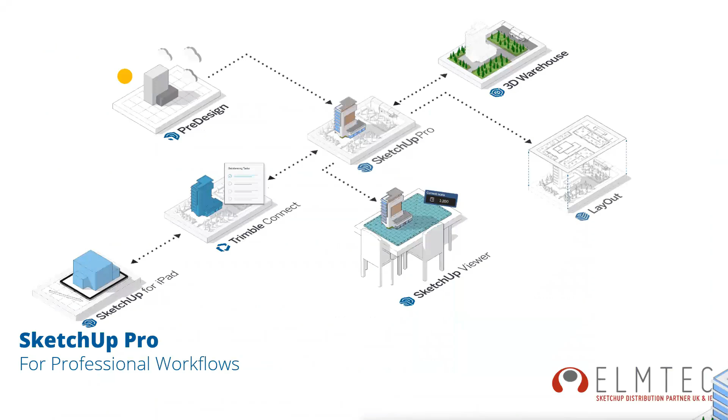I'm just going to flick through these things here. And whilst I'm talking, I will throw that one up. Oh, that was the results of that, by the way.

Let's just give you a little overview of the current ecosystem for SketchUp. SketchUp Pro, you're probably all familiar with it, the main core 3D modeler, the desktop one most of you are probably using on Windows and Mac. There are a whole bunch of other products that come included with that. There are two primary SketchUp professional subscriptions available at the moment. We've got SketchUp Pro, which is for professional workflows.

And then we've got SketchUp Studio, which is for more advanced workflows. This has got a few extra components we'll talk about also, and new for this year, because it's not on this graphic, we've also got the Revit importer, which we will talk about today.

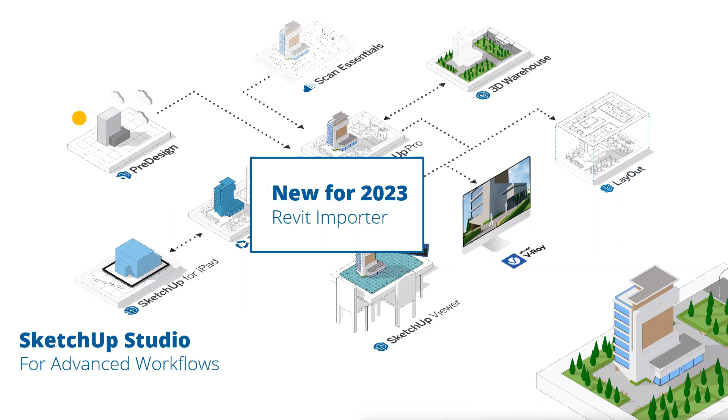So today's webinar will go through some of these components of SketchUp, things you already have access to. I'm going to introduce a few things that you may not be aware of, and introduce some of the new features of SketchUp 2023 as well.

So what we know about SketchUp is it's used across various design stages, and it's accelerating the design process from concept through to design, modeling, stakeholder collaboration, construction, documentation, and more. Depending on the industry you work in, you may be only operating within one of these phases, or you may be operating across all of them. But what we want to show you today is perhaps how you can operate across more stages, or collaborate better with other people using SketchUp or other products.

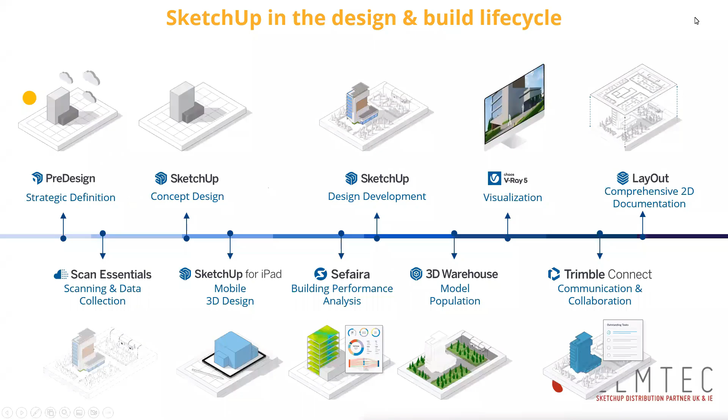This will have links to downloads for anything included in your subscription, links to learning content, tutorials, the ability to sign out of any installations you have, all kinds of stuff. So if you've never visited myaccount.trimble.com, it's a super, super useful link to be able to get to.

And we're going to go through some of these products just now. Let's bring that one up again. Sorry, I have to flick in and out of desktop a few times and it kind of pings off.

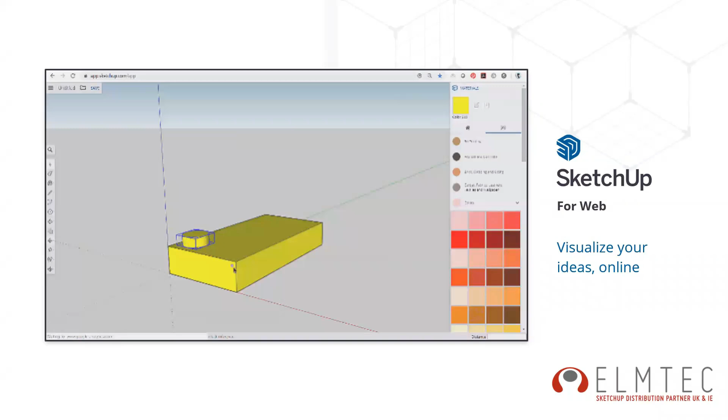Included with your subscription is SketchUp Pro for desktop, which is likely the core reason you're using SketchUp. You've also got access to SketchUp for web, a slightly more sophisticated and fully functioned version of SketchUp free. It has all the main stuff you'll be familiar with, and it's constantly being developed, getting closer and closer to the desktop version. There are some really nice advantages to using SketchUp for web, the main one being you don't need to install anything - you can access it anywhere by signing in via the account management portal or app.sketchup.com.

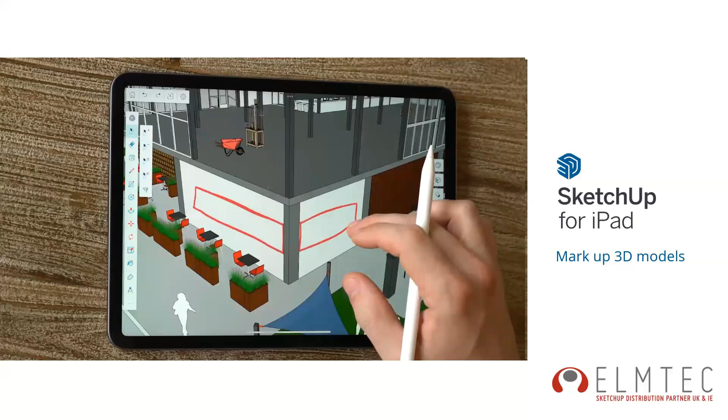Newish, launched last year, we launched SketchUp for iPad. This is included within a SketchUp subscription. If you have an iPad and haven't tried it, simply download it from the App Store and sign in with your subscription Trimble account, which unlocks the SketchUp viewer into a fully functioning SketchUp editor. It's very similar to SketchUp for web, but with some unique iPad specific features, like a touchscreen interface and support for the Apple Pencil.

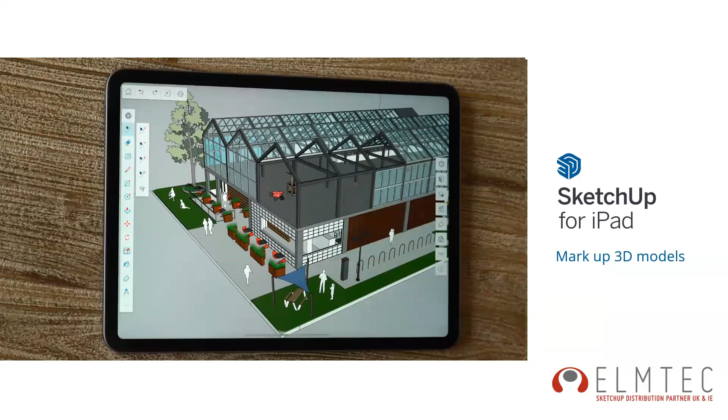What we can see going on here - I'm not sure if it's going to loop round again - SketchUp for iPad has a really nice mode called markup mode, which allows you to draw directly onto your model, annotate it, and make notes. It saves it into a scene inside SketchUp, and you can then project those into textures onto your model as well. Some really nice functions inside of SketchUp.

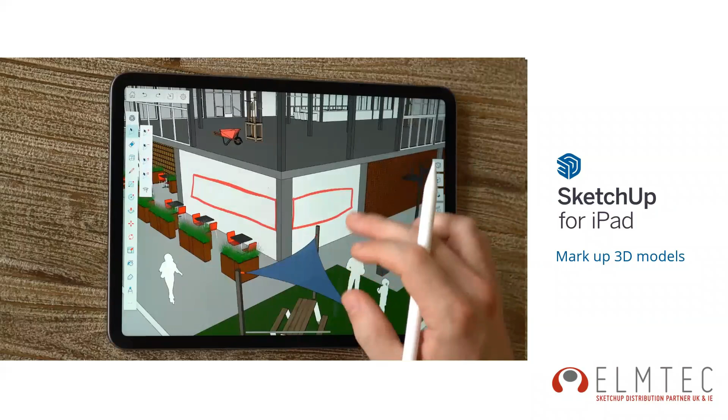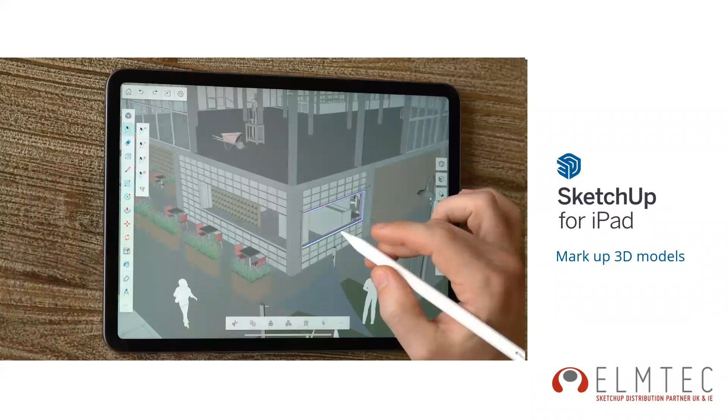This year, there are additional functions you'll be familiar with from the desktop version which have also been added to the iPad one. We're not going to go through all of those since there's too much to talk about, but take a look at SketchUp for iPad. It's really great, actually - I wasn't sold on it at the start, but I've had a lot of time to play with it, and it's super great.

One of the things we can do with it beyond just modeling is actually place our models directly into the scene. You'll have seen these kinds of things already, but you'll be able to do it yourself with either things you've placed inside your model, or perhaps even a whole building or structure if you need to show somebody how that might look in situ.

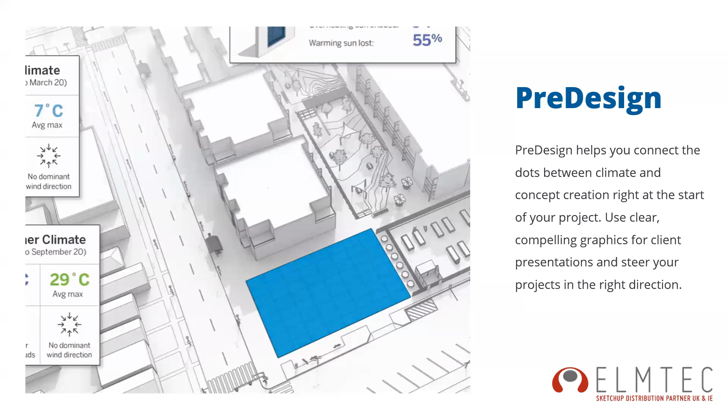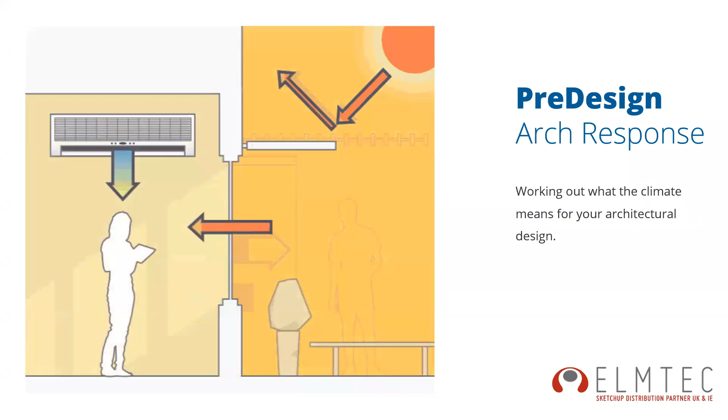So we're going to have a look at something - we'll do a little demo of this one. This is going to be particularly useful for people working in architecture or construction. There's a web service included with SketchUp called pre-design, which there's a couple of different ways to get to, and we'll take a look at in a second. Pre-design is a sort of climate insight and site insight tool - it gives you information about the location where you may be planning to build or design around, and hopefully some broad insights into things you might want to be considering. There's some really great stuff you can get to on here.

Let me just open it. There are a few different ways you can access it - directly inside SketchUp via the file menu under pre-design, or you can visit predesign.sketchup.com since it's a web service. I'd really suggest you have a good look at it; we have some built-in tutorials - click here to do guides, which takes you on walkthrough guides for how to use it. I'm just going to show you broadly how it works.

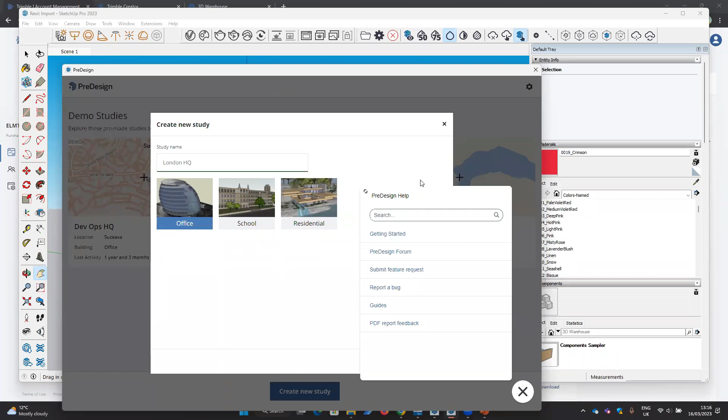I'm going to make a new project called London HQ, and set this type of project as an office project. I'm going to set its location - being super lazy, it'll just be generically London - and click continue. It's going to set some schedules for when the building will be used, and basically bring up some information about that site and location. It's just populating that report right now.

What we'll see here is some really great graphical information when it loads. I was keen to show this live, because I think it's one thing showing an animated GIF, but another thing to be able to show the actual thing working correctly.

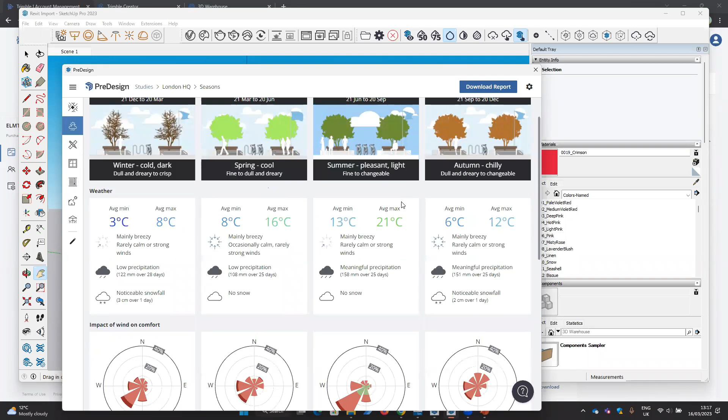Definitely go have a look at it if you're an architect, I think you'll find this super useful. We can pull up sun diagrams for the location, and information about seasonal variance. In the UK you might not assume it varies so much, but perhaps you're working in other parts of the UK or all over the world.

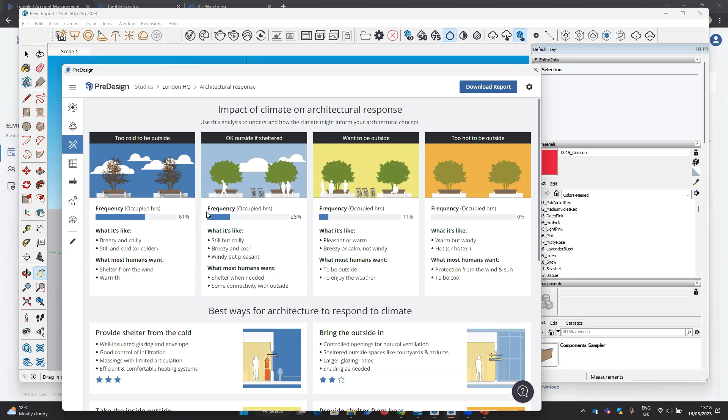We can bring up information about the predominant wind direction, precipitation, daylight hours, all kinds of stuff. This is useful to show a client, to explain why we're starting to make some of the decisions very early on.

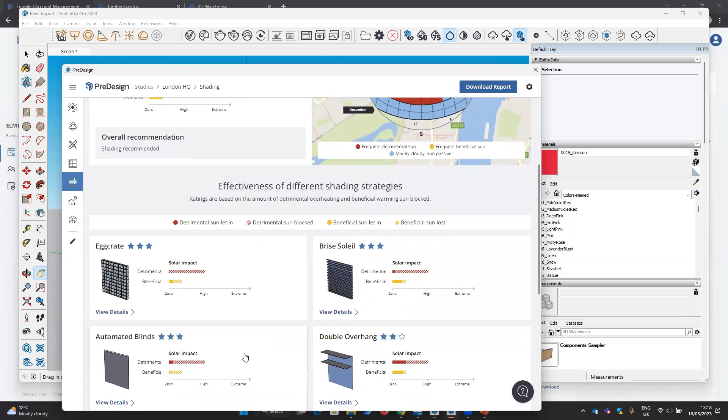There's some really amazing stuff here about sun overheating, the effect of the sun on different facades, and it will give you advice about the effectiveness of certain glazing and shading solutions on different sides of the structure. So have a look through that, it's interactive, with some great graphics to help you get insights into what you're working on.

So I'm just going to close that. You can even download a little PDF report that has everything in it. Let's head back to my slides.

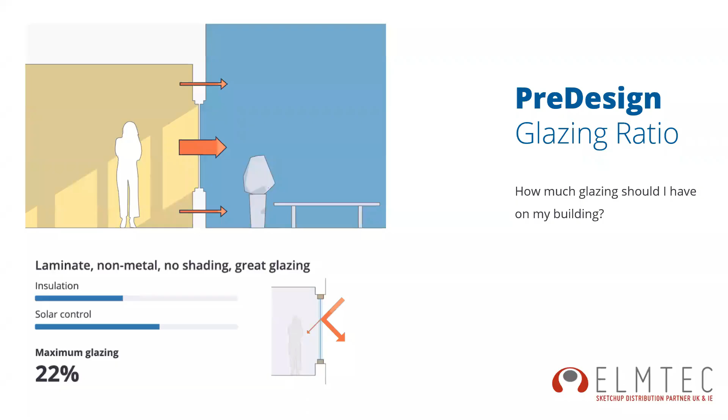Slides, come back please. There we go. Yes, so there we are - Predesign.sketchup.com. Really great.

We're going to move on to something else in just a second. We're going to talk about Trimble Connect, which is again another key component of a SketchUp subscription now, and kind of the glue that binds together various different packages.

But I just realized I wanted to ask some actual questions about the industries people are working in, because I probably should have thought about this and tuned my language accordingly. If you could let us know what kind of segment or industry you work in, or who you're working with, that'd be really great.

There we go, we've got some other ones. Thank you - submarine telecoms, architecture, event and production. Yes, I only had 10 slots to put on this, so thank you, it's really good. Events, yes of course, garden design, yes brilliant, interior design, yeah, so thank you.

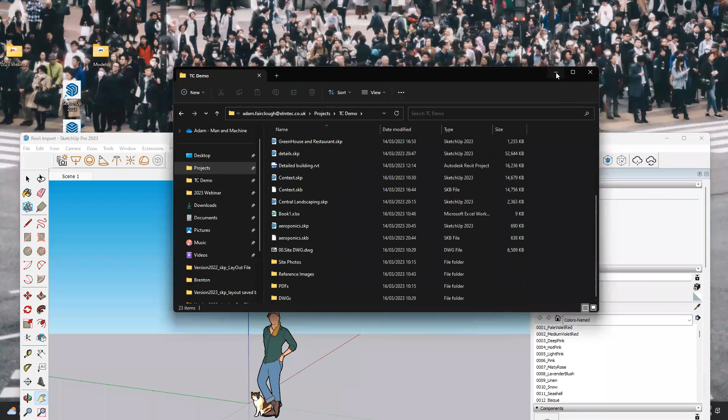Yeah, I've lost my window. Where's it gone? So here we go.

With Trimble Connect, there are a few different ways we can do this. We can create a project and drag and drop our files directly into the web service, or, as I do, visit Trimble Connect, go to apps, and download an app called Trimble Connect Sync. This is available for Windows and Mac, and it will automatically sync your local project files with the cloud project files.

Trimble Connect has massive accreditations and meets various ISO standards, so even if you're working in a very large organization, you'll find it probably hits all of the security policies and things you need on the head. So let's come back to where we were.

This is what you might see to begin with - this is synchronizing with my local computer. Every time I save a file in SketchUp, update a PDF, add another photograph, or make a change for DWG, the Trimble Connect Sync app will push that change into my cloud storage. I've chosen to put my cloud storage in a European server, but again, you have control over where in the world it's stored.

Some very basic stuff we can do inside of Trimble Connect: perhaps I have a DWG file and don't have a viewer to hand, but I can click on it and see that file. But it's white on a white background right now, which isn't very helpful. Let me try something else.

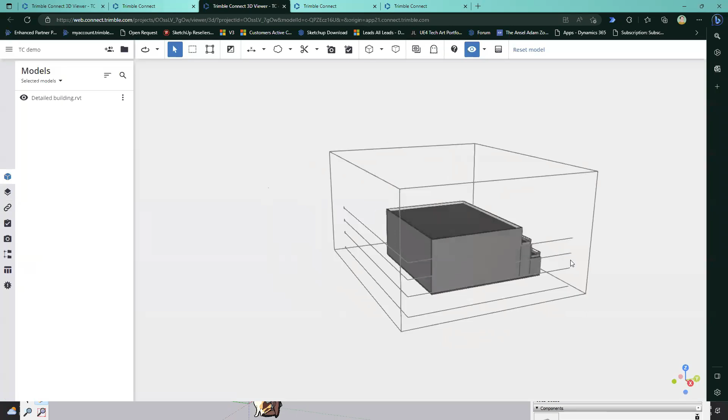Let's look at a 3D model. Right, so we've got a Revit file here. Let's open this one - I'm just hoping my computer hasn't had some kind of freak out. There we go. So we've got a Revit file that we've loaded into Trimble Connect, and we can view it, remove sides, and do all kinds of viewing type things.

If you just need a quick glance, but perhaps you want to share one of these files with a colleague - for example, I'm going to share my central landscaping SKP file, and I can choose to share this with a team member who's part of my project. So maybe I'm working in the office with a handful of other people - you can invite them into your project and they will have access to whatever you give them access to.

You can directly send them a file from the cloud, or send the file to somebody else who isn't part of your project - send it to my colleague there. I can set when that link will expire and how long they're able to look at it for. And I can choose whether they can only look at it inside the web browser, or actually download it and make changes to it also. So you have some control over it there.

The third option, the nuclear option, is you can send a link to the file that anybody who has the link can access. I just had a question come up here.

Is there a storage allocation with Trimble Connect? If you have a SketchUp Pro or SketchUp Studio subscription, you actually have unlimited storage. So yeah, I mean, I imagine there is some limit somewhere, but unlimited is what it says.

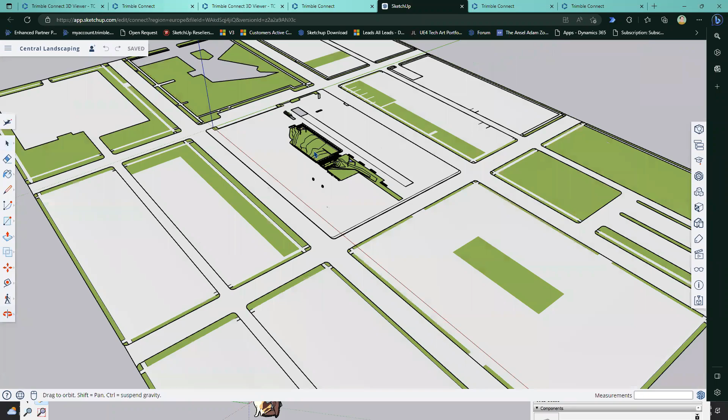We can actually edit our files directly from Trimble Connect. So if we're in the web service, we can ask it to edit, and this will edit inside of SketchUp for Web. So if it's a very quick change you want to make, we can make our changes here. What's really neat is - I'm going to make a really tiny change somewhere because I don't want to ruin other parts of things later on.

If I hit save, that's automatically going to save that file back to Trimble Connect. And what is also super great about how this works is every single time I make a save, either on my computer or online...

Can I look at this one actually? It creates a history, a total file history, so I can actually go back to any point in time when my file was saved, and I can download that file at that point in time. Now I'm the only one here that's been editing this file, but if my colleagues have also been interacting with the file and made changes and saves, you will also see their saves, and you'll be able to download those or essentially revert back to them.

So from a backup and file history point of view, or a collaboration point of view, some really, really super useful functions. A couple of questions there.

Show a DWG file - if it's a DWG file, bonus points. Trimble Connect actually has a fully formed, maybe that's not the right phrase to use, DWG editor built into it. So if you don't have access to AutoCAD or don't have access to it where you are, you can actually make changes and edits to your DWG directly inside of the web browser and save it.

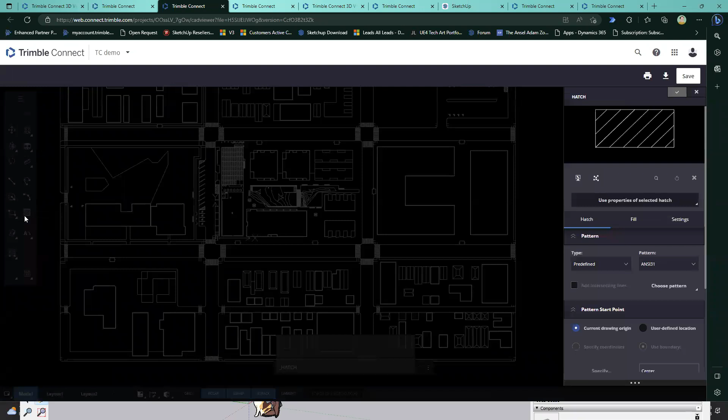And if I did do that, what can I do? I've hit edit. I'm not an AutoCAD type person, so I'm going to fumble around looking for some simple shape. Let's just draw a line, do that. There we go, I'm going to click save. That will populate back to our original file, but it will also appear in our file history. Here it is - so we've got kind of basic file management. It doesn't overwrite anything; it always keeps a history of everything going here.

And so some other questions there - you can work on exactly the same file at the same time, because every time somebody saves, it will create a new one. But there are some really nice functions to, for example, check out a file. So if you know that you are the only one who should be working on a file, you can check the file out, which prevents anybody else from accessing it for a period of time. So some really sensible tools for working with multiple people.

Now, where it becomes really useful as well is if we look at one of these 3D objects in the viewer. I can actually load in every single file that is being used inside of my model at any given time. So let's just load it.

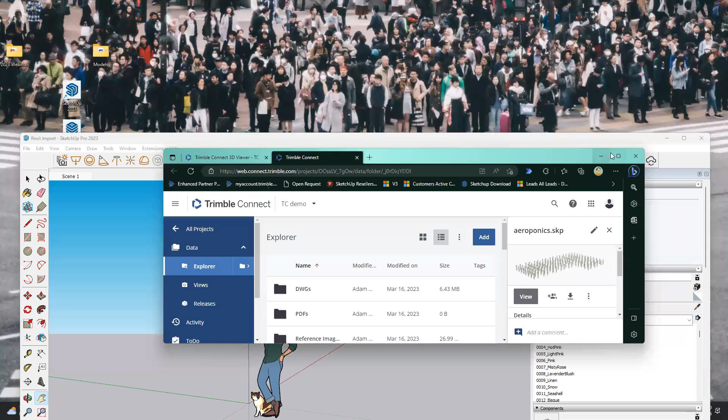I am really stressing out my internet connection, I think, and my web browser. Give us a second - lots and lots of tabs open when you're demoing, not the best of ideas. Right, let's try this again. Where are we? Let's try opening one. Bear with me a moment, I think I'm having some computer issues. It's quite intensive having to stream two screens to multiple places. I've got some noise cancelling stuff going on that's interfering. And of course, when I was checking all of this just half an hour ago, everything was happy - until we've gone live.

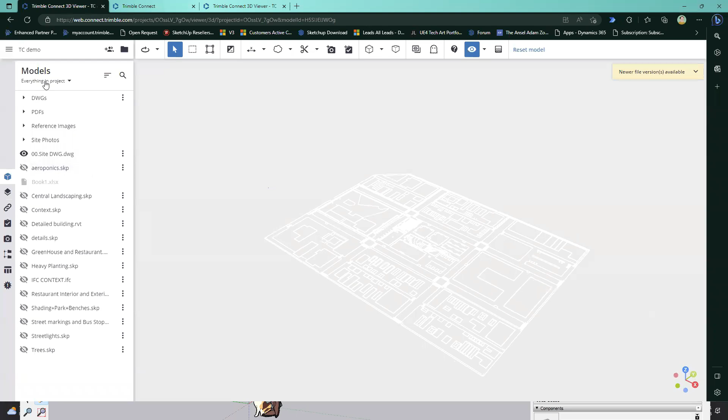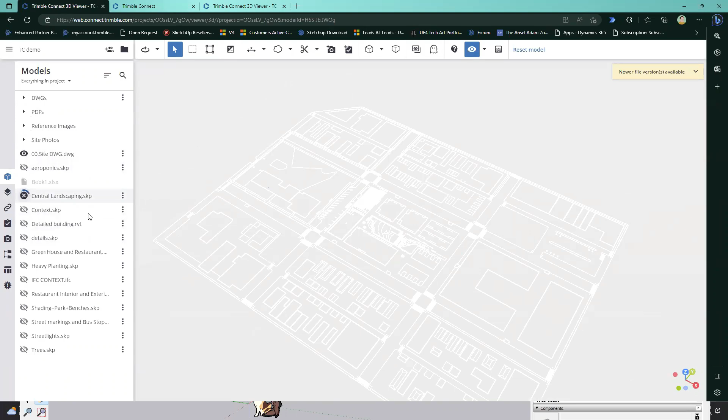Give this one - oh okay, I've got one here that seems to be open. Yes, okay, right, so I've actually loaded in everything inside of my project. I've got a fairly large scale project here constructed from DWGs. We've got a SketchUp file for our landscaping, and some additional geometry for our context, also in SketchUp format. At this point we've got some IFC context which I can load in on top of it, so Trimble Connect is pretty agnostic towards lots of different file formats that you use. I'm going to load these all in - there's some Revit files, there's all sorts of stuff, and this is a complete project for a whole block, for a whole building.

And we can cohabit - cohabit's not the word I want - we can place all of these files into this centralized space. Even if you're not a designer or an editor, perhaps you're managing the project or a studio manager, you can be there, able to see all of these changes coming through live. Here we go, somebody's made an update to one of the files, and I can request that it populates into this shared space. So Trimble Connect, super great for all of that stuff.

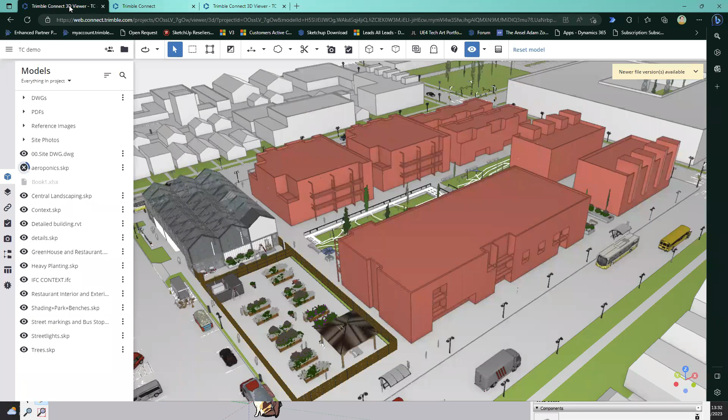And I'm going to crash my web browser once more. So I'm going to stop the Trimble Connect stuff there. I would really advise you to have a look. I'll show you a couple other ways that you can access it. I think, yeah, there we go - I'm full and crashing now.

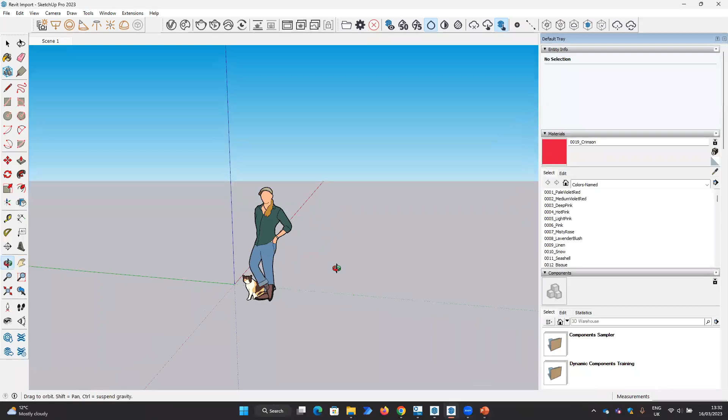The ways that it kind of interacts with SketchUp directly, if I just jump back into one last thing - so I just realized I did need to show you something there.

So this is all happening inside the web browser. But there is also a desktop client. If you need to work a little bit more offline, you can use Trimble Connect for Windows, which is a very similar interface, but is a standalone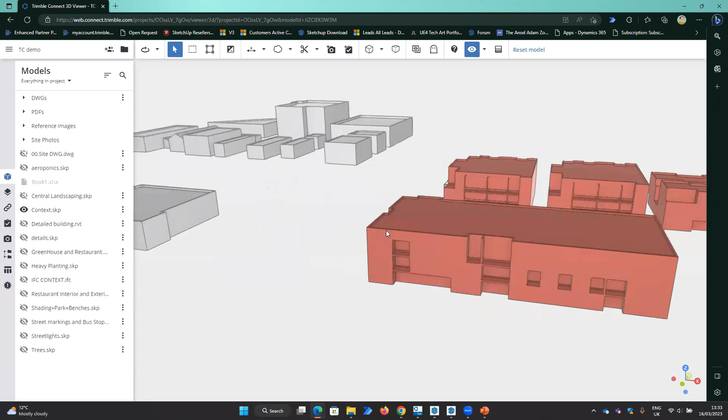software that can interact both directly with your local files, but also the cloud ones. Perhaps I've got a file here. Let's have a look... zoom in too far because, sorry, this is pretty tragic right now. Right, we've got some geometry.

There's something that I need a colleague to take a look at with my project. I can actually annotate. Maybe there's something wrong with this corner. I could take some measurements for whatever it is. I don't know what I'm doing here. I'm going to actually create a to-do list for my colleague Kyle and say, can you take a look at this corner? Something should be there.

Please add railings. There we go, you forgot to add them. And can you please add that to the model by 7th of July? And allocate that to one of my colleagues, Kyle. I'm going to say it's a comment or it's an issue, and I'm going to say what the issue is.

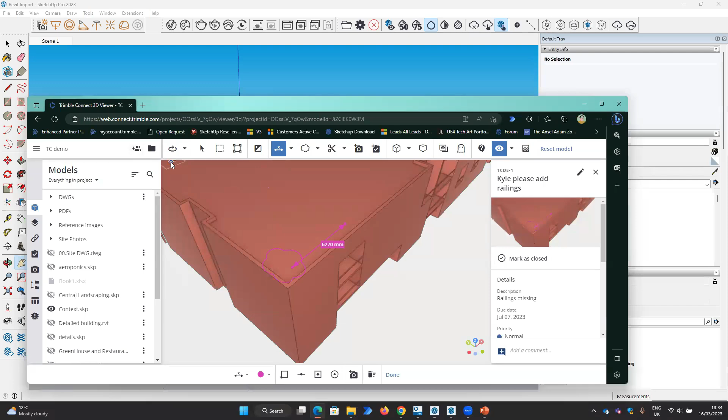And what that'll do is create a little to-do list embedded into this project. So if I end up going, let's have a look, let's jump into SketchUp. I'm going to actually open a file directly from Trimble Connect inside of SketchUp. I'm going to open my model here, and I'm going to jump into that project because I want to work on it inside my desktop version.

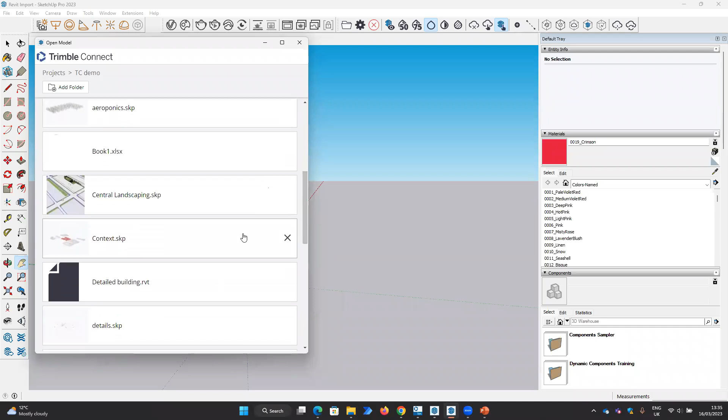And that particular file I was working on was called context. Open that one. Got that model there, and I can make edits, save it, publish it back, and it will reflect.

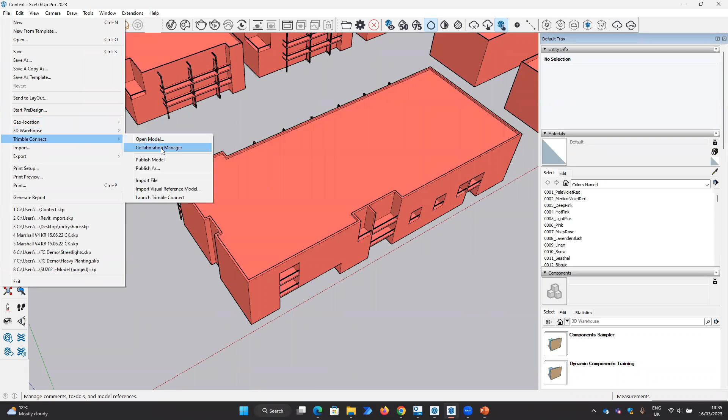But what I'm interested in here is I've issued to my colleague a request to do something, and I can actually see what that request was, which was here. It's got a little thumbnail. In fact, if I click on the thumbnail, it will take me to the area that I maybe need to pay some additional attention to. So you can create those to-do lists that are very visual and also map exactly the physical location in 3D space to the model itself.

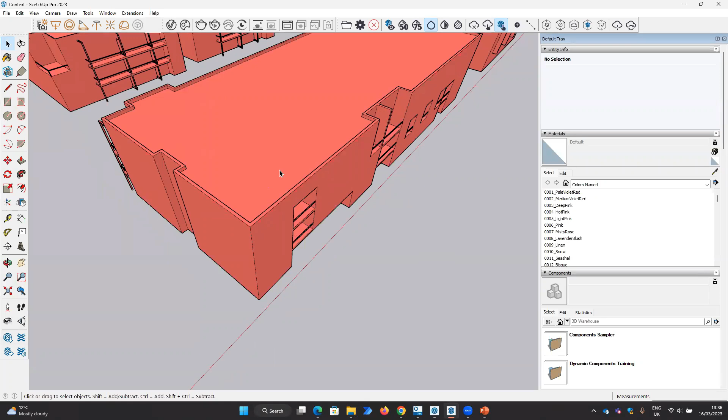And perhaps I'm not going to add some railings, but perhaps I've made an addition to this model. I can publish that back to Trimble Connect or save it to my local project file if that's the way in which you're working, and that change will be reflected across the wider project.

So sorry, I'm talking quieter as I need to have a drink of water. Cool, thank you, that's that one. I just said thank you to a glass of water, but thank you for bearing with me also.

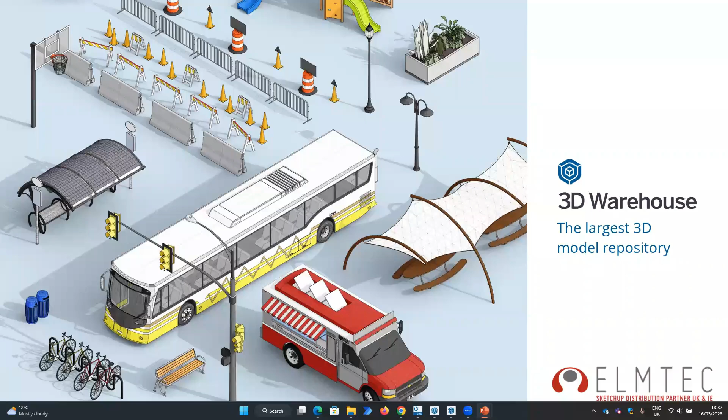So I'm just Windows wrangling again. Okay. Don't sign in. Oh my goodness, I've lost all of my polls. No. There we go, thank you.

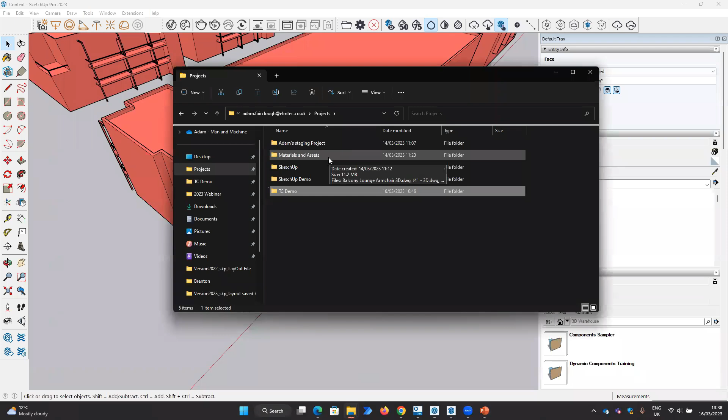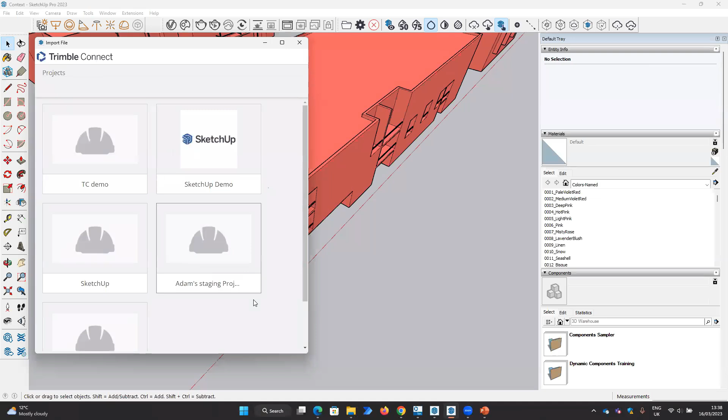And again, you can imagine this if perhaps you're working as part of a team, you've got particular fixtures or fittings or materials that you need to use. And again, perhaps these are in different formats. I've got a few chairs, I think, that are in DWG format that I grabbed from the Hay website. Basically, I can import from my Trimble Connect storage

materials and assets that I've chosen to store there. And again, those will come complete with their own file history. So if you've made any revisions to those or changed them, or a colleague has, you can see them there. So that's like an alternative way to manage your component libraries by storing them inside Trimble Connect. If you've got them as SketchUp files, you can of course link your SketchUp directly to that folder in a different way. But Trimble Connect will let you manage and work with different file types, which is in itself quite useful. Anyway, let's go back.

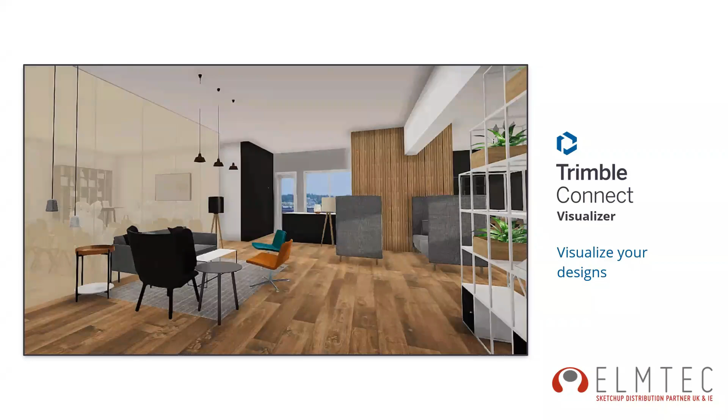Every time I pop out of that, that goes. So yes, brilliant. Didn't show it, but there's also a basic visualizer built into Trimble Connect desktop client as well. So sometimes if you need to just pull up something that looks a little bit better than SketchUp, you've got a little bit of control over that too.

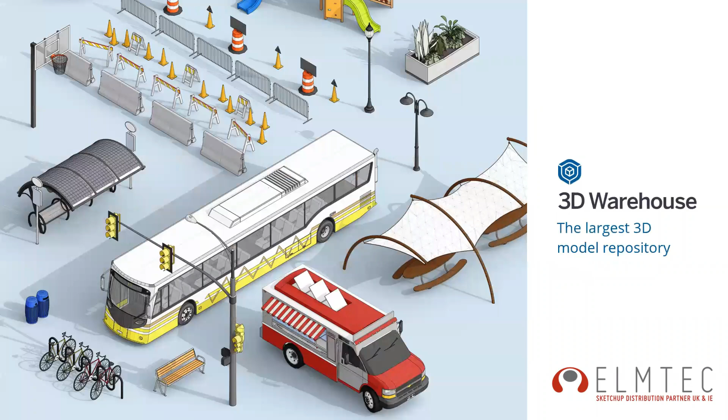So another little hidden bonus inside your SketchUp subscription. These are things many of you are familiar with: 3D Warehouse, included with your subscription, and Extension Warehouse, also maintained for subscription users. If you've never visited these, 3D Warehouse is the world's largest 3D model repository to populate your models. Extension Warehouse allows you to add additional functionality into SketchUp that developers have produced. So perhaps you're used to another piece of software and wish SketchUp did something - you can quite often find a tool to do it. For example, there's a popular one called Skatter, which lets you scatter things like trees randomly across a large surface, saving you having to place them manually.

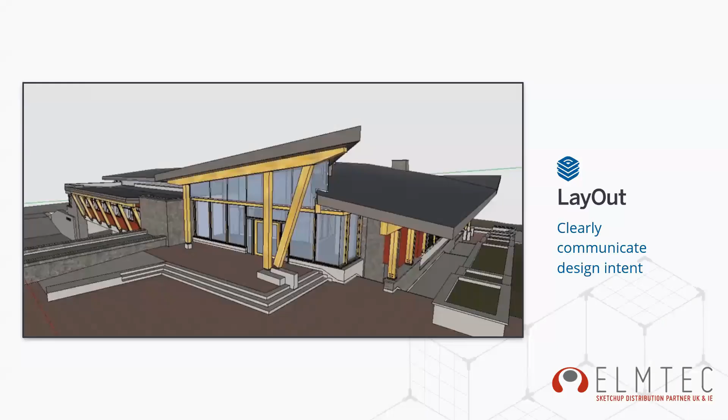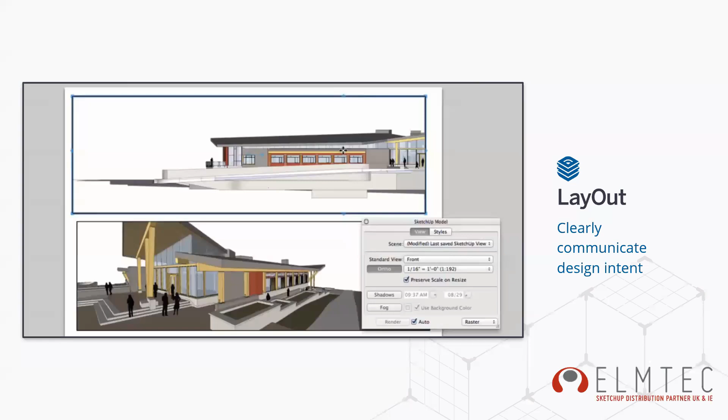This is one of the core components of SketchUp that a lot of people use, but a lot of people don't. If you're not familiar with it, LayOut is our 2D tool for SketchUp. With SketchUp you work in 3D and build a 3D model, but you often need to present those in a 2D way. Here's a looping GIF showing somebody placing multiple viewports of SketchUp and starting to annotate and dimension the model.

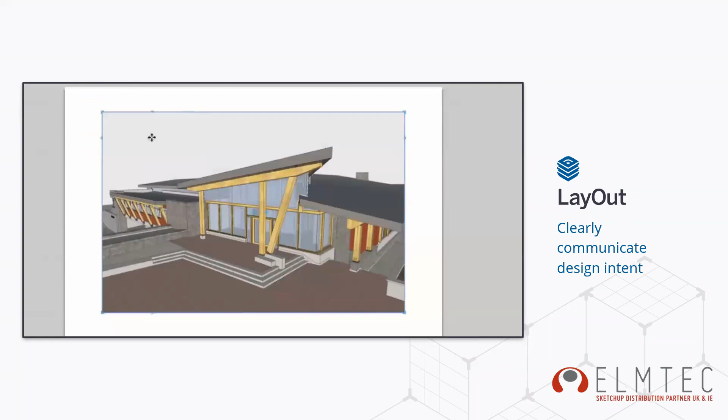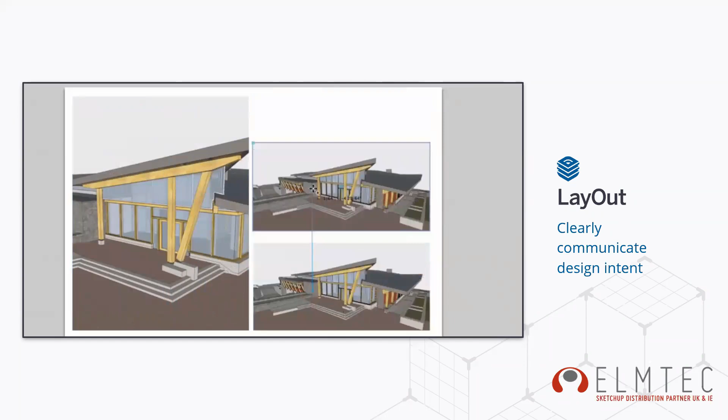The really great thing about creating your construction documents this way is that once you've placed and set up your paper page on screen, if you go back to your SketchUp model and make a change, you'll see those changes immediately propagate back through your document. Where it can, it'll even try to keep dimensions and other things in place and adjust them to match any changes you've made. So LayOut is super, super useful - a big tool in itself with lots to learn, and it's just as fully functional as SketchUp desktop itself.

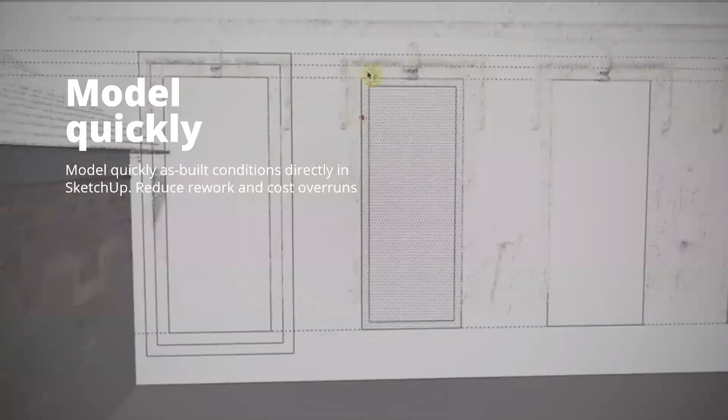Skipped ahead 3 slides. Part of SketchUp Studio is an additional plugin called Scan Essentials, which allows us to work with point clouds. We can bring these in from a professional grade LiDAR scanner, or as we're now seeing users do, from consumer products that can take point clouds. If you have an iPhone 12 or newer, or an iPad Pro, you can take point cloud scans on those devices and save them as a generic standard, which we can open inside Scan Essentials. The point cloud was just on the screen for a moment then.

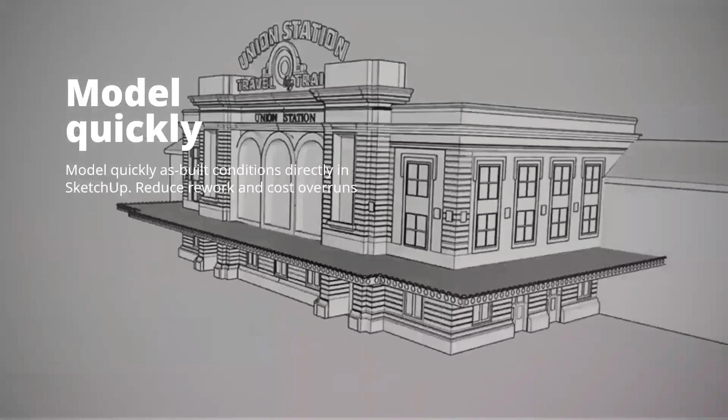That's the very dotty representation of 3D space - if you're not familiar with how that works, there it is. Basically, our device shoots out beams of light and calculates how long that beam takes to hit the object and come back to the camera, then records the color and distance of that point in space. By doing this millions and millions of times, we can construct a loose cloud of droplets of data that we can view in 3D space.

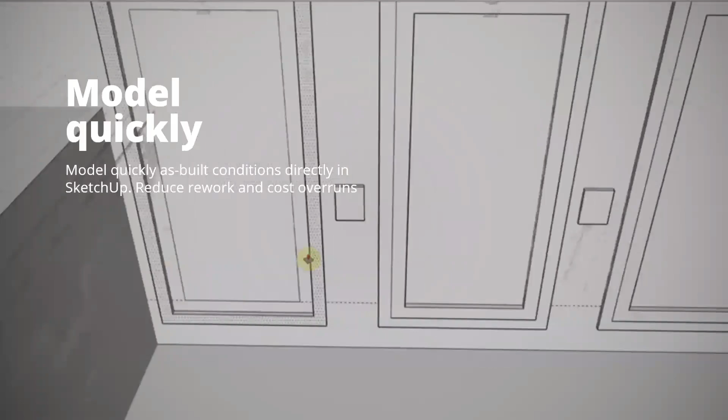What's really great about using this inside SketchUp is we can bring those point clouds into our model as a visual reference and start to model over it. So rather than taking references from photographs, we can take a scan. This has lots of really useful benefits - it's very, very accurate. Those laser scanners, particularly professional ones, are super accurate. We can do that from ground standing stations, from drones, or from little robot dogs that walk around and do it for us. Of course, that means you can take a scan and never need to go back again - super useful if you don't want to keep returning to site.

Super useful if you don't want to go somewhere dangerous, like up there, and you want to take a measurement. You pull out the tape measure tool in SketchUp and we can measure the distance between any two of the points that make up part of that component.

You can also bring a point cloud into LayOut and start to dimension it, using it as a visual reference in your documentation as well. So Scan Essentials is really great. Just checking I'm all good. Yeah.

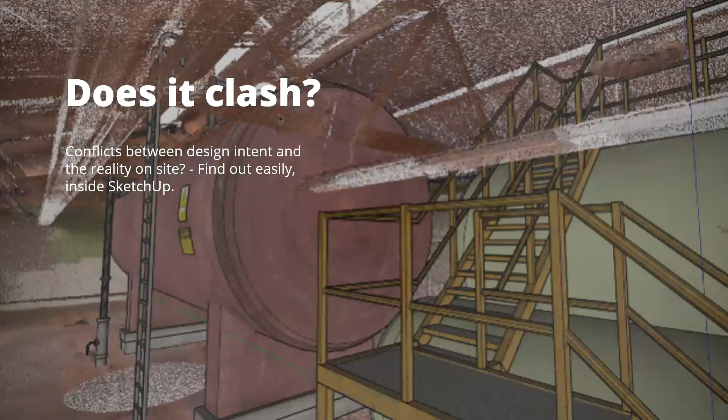We can also use this information to make sure that any new additions to the building aren't clashing with things that already exist in the building. So lots of really great uses for point clouds now, and SketchUp with Scan Essentials makes that quite accessible and simple to use, because previously it was quite complex.

So I've got two slides back to front. Included with your SketchUp Studio subscription, we actually have V-Ray 6 for Studio included as well. If you're not familiar with V-Ray, it's a really, really mature, well-developed, well-supported, well-liked offline renderer. We can use it to create photorealistic images or even animations and videos.

V-Ray 6, if you're not familiar with it, has a couple of amazing new features that are part of this subscription, included with the version you get. Light Mix basically allows us to take one render of an image, and it records all the information about the lights and light sources, allowing us to turn them off after the fact.

So we render once and then we can remove, for example, the contribution that the sun made in terms of lighting to our model and make it nighttime, or increase the intensity of a particular light fitting, or change its color. This gives us a lot of flexibility to not have to render our image repeatedly to achieve the look we want.

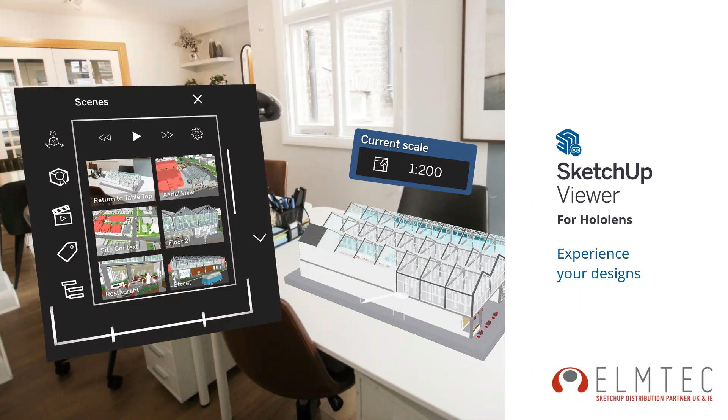that it's simpler. I've got a slide there for SketchUp Viewer, which is actually not a SketchUp Studio specific function—that's part of SketchUp for iPad. So ignore that. Okay, so I'm just going to check the questions again.

How are we doing for time? Yeah, we are approaching the end, or my time limit, I think. I think we've got a bit more time, but I don't want to keep you all too long. Just checking the questions there.

So just some questions there about Scan Essentials. Can the software be used on a Samsung phone? I don't know about the specifics of what hardware those Samsung phones have, but if there is a Samsung phone with LiDAR scanning capability, I'm sure there'll be an app that allows you to save it to a format that can work with it. But we certainly know that the Apple ones do have that function.

Somebody asking about Trimble Connect: from previous, if we only have one SketchUp license, can my colleagues access the files in Connect? Yes, your SketchUp subscription gives you access to a Trimble Connect business account, and you become like the main person inside that project. I think you can invite up to 1,000 participants as guests into that project, so yes, easily get your colleagues in there unless you've got more than 1,000.

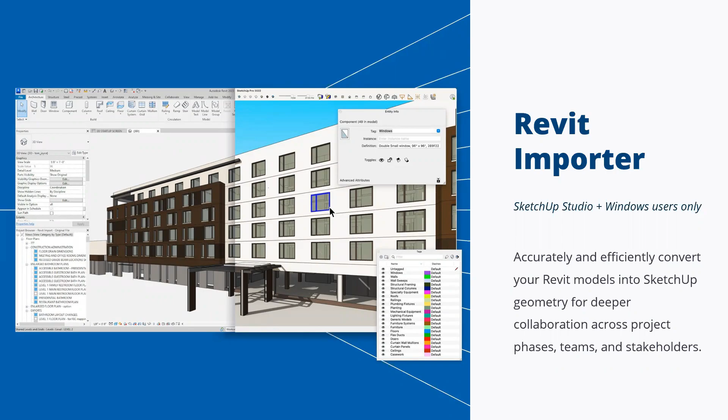Now, the Revit importer - I've got some slides, but I'm going to quickly show you that it actually works today, because I'm now worried that nothing's working live for me. But the Revit importer is really nice - it's native inside of SketchUp as part of the Studio subscription. You don't need to have a Revit license or an AutoCAD license for this to work. It just happens inside of SketchUp Studio.

It's designed for SketchUp, so some really smart decisions are made to make sure those files are created in the right way, and the files look really great as well. And it brings through all the data that we can.

Let's just bring up an example of this and get really spicy and see if it breaks, because my computer is not happy today. We're in my webinar - there we go, there we go. Let's open that one there. So this is just my sample file ready to go. And whilst that is going...

I'm also just going to ask another question as well - I probably should have asked this before. I talked about collaboration, but what kind of spread of people have we got? Have we got people from practice or from studios, or are you working by yourself?

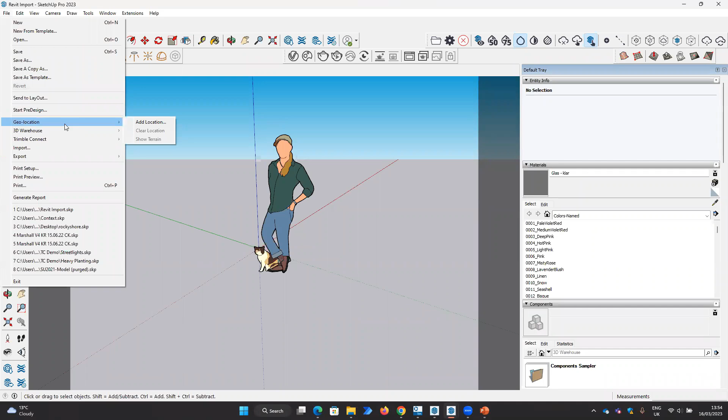But we can basically, inside of SketchUp - this is a regular SketchUp file - actually import a Revit file. I'm going to come to my import menu, and because I want a good demo, I've got a tiny file and a big file - I'm not going to do the big one. So this is actually a full Revit sample project from the Autodesk website. Basically what SketchUp is going to do here, the Revit importer, is try to interpret that file, and it does it based on what's visible in the starting view of that particular project.

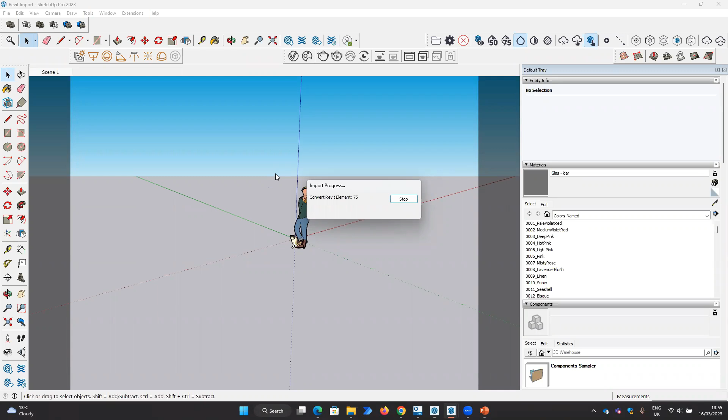So I only have to talk for a little bit because I think this gets to 66 and then it will be imported. There's some really smart decisions being made here, because essentially Revit's geometry is parametric, and it's an entirely different language of 3D geometry to what SketchUp uses. Oh, it's gone past 66 - that's slightly concerning. So the importer is trying to interpret that in a way that means the model looks the way that it should look.

Retains the data that we would hopefully like to have, and performs well inside of SketchUp as well. So this is, again, a full sample project. This is everything, exterior, interior, everything. It's probably easier just to show you. You can see kind of everything that's going on inside this model.

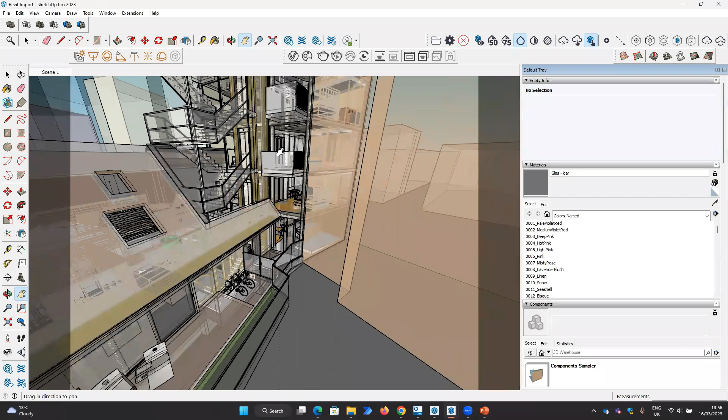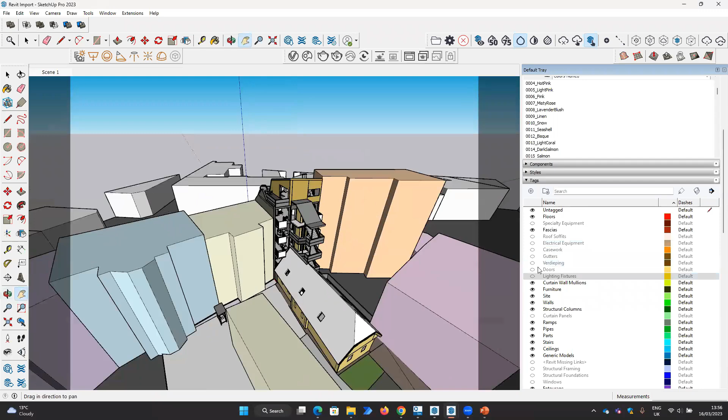Big one here. And if I jump into my tags, we can see that it's pulled through different pieces of information in regards to how that model was originally constructed inside of Revit. This will make it easier for us to organize, change, or make amendments or adjustments that we might want to make, either for visualization or just because we need to do some sketching inside of SketchUp and see how that might look.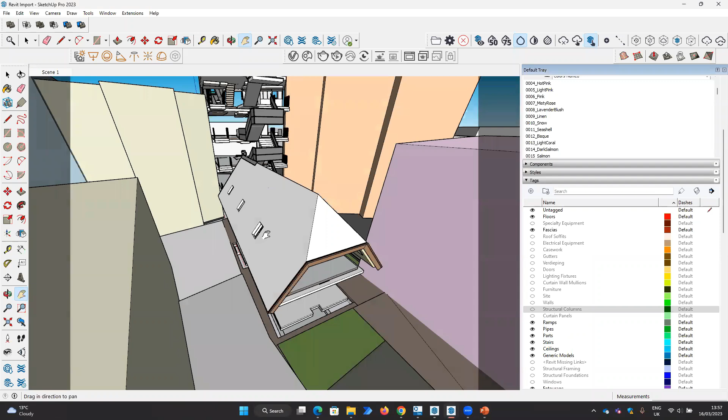I'm hoping one of my team did see that, if that was the case, and lets me panic in case that did just do what I was thinking might have just done. I've just imported a Revit file and it's here. And we can operate on that in our normal SketchUp way. So the Revit importer, really great.

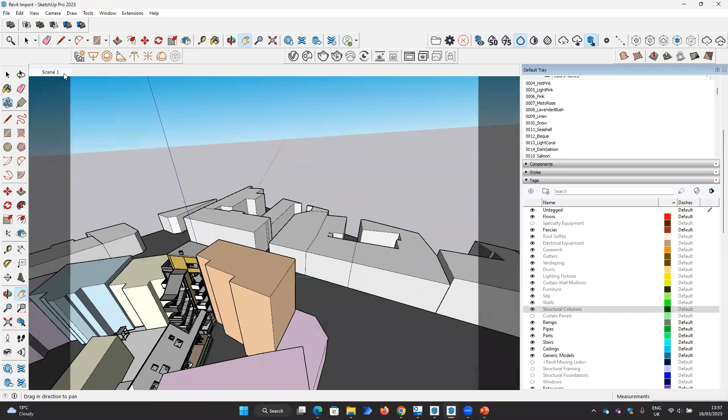And I think we talked briefly about V-Ray earlier actually as well. I mentioned that it's included with the SketchUp Studio subscription. As we're here, and I've set up a view for it already, I'll just show you how we can work really quickly now with V-Ray. It's been really streamlined. One of the functions in V-Ray that's really nice is something called Light Gen.

And what this will do is it will bring up a little dialogue for me. There we go. We can basically say, are we doing an interior rendering or are we doing an exterior rendering? I'm going to do an interior, and basically I can press a couple of buttons and it's going to generate a selection of lighting scenarios for an interior.

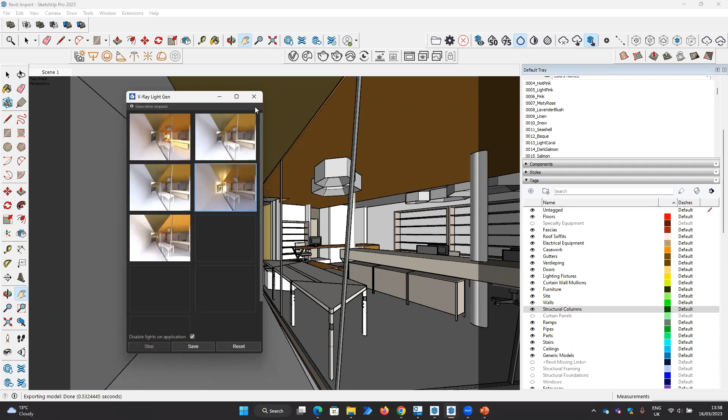I don't know how well this is going to work live. There we go. It's just going to render little preview thumbnails, and because I have tested this before, it should be number 4 that I'm going to choose, which is that one. I'm going to stop it. Now I've applied that little preview to my model.

If I click render, it's just going to run some calculations across my model. And what we should get now is a more than serviceable render of this perspective in V-Ray, just with 2 clicks, 3 clicks, didn't do a great deal there.

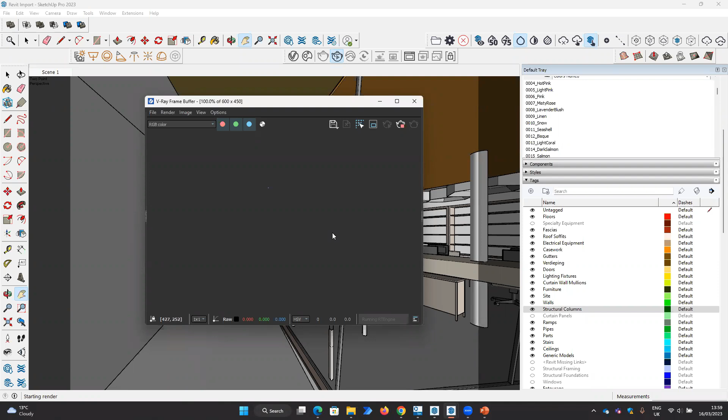I tried to be dead honest with this and actually not pre-prepare any of the model or change anything. The only thing I pre-prepared is I framed this one view, but we've not set any lighting, we've not made any changes inside of V-Ray, just gone ahead with it.

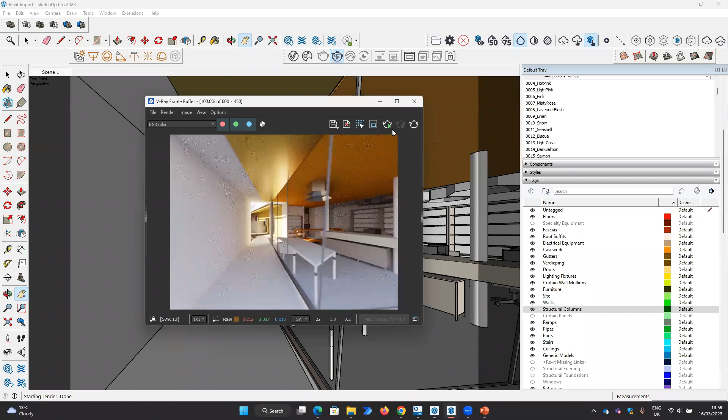So this is actually pulled straight through, as we saw, from a Revit file into SketchUp, and then we've chosen to start rendering some images inside of SketchUp. There are plenty of reasons people choose to use SketchUp for their rendering over other modeling packages, because there's quite a lot of bits that are a bit tricky to do in Revit or ArchiCAD or whatever. So yeah, Revit importer, really easy, really valuable, and it's an addition that's really changed and sped people up significantly since it launched.

So yeah, there we are. So approaching an hour. I think we have got like another half an hour on the books schedule, but I think we're kind of approaching the end now.

Just some other little functions that have come new into SketchUp 2023. There's a new tool on your toolbar called the Flip tool that when you click it brings a graphical representation of the planes and the axes that you are going to be flipping across. So it makes it a lot easier to know whether you're flipping in a particular direction, which is a really nice little incremental addition. This is how software is made now, incremental improvements all the time.

SketchUp has had some performance improvements in SketchUp 2023. The one that is here is multi-threaded saving. So you may be aware that if you're working on very large projects, it sometimes takes a long time to save. The saving process has been optimized to take advantage of modern processors, so it can save quite significantly quicker than it could before. There are some other undocumented performance improvements.

SketchUp 2023 performs, for me, significantly better than even last year's version. Even in very large projects, I'm seeing sort of double the frame rate, the actual moving around the model being twice as smooth as it has been previously. And we've seen that kind of improvement, that uplift across Windows and Mac.

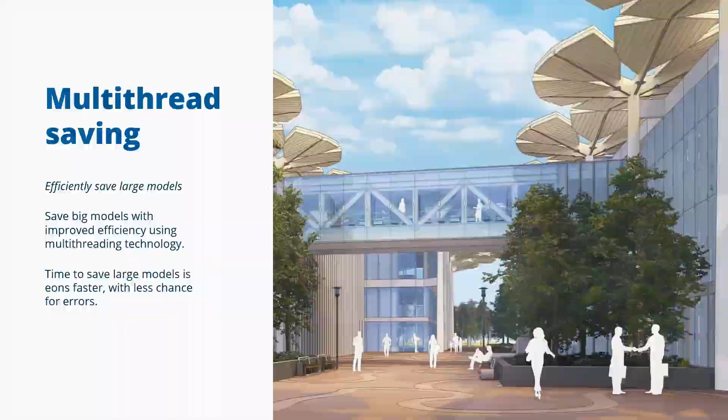New functions in 2023, you've got the option now to bring DWG references directly into LayOut, just as we can do inside of SketchUp itself. And then, of course, you can relink those files, update those files from Trimble Connect or from another colleague without having to rearrange stuff or change your layers.

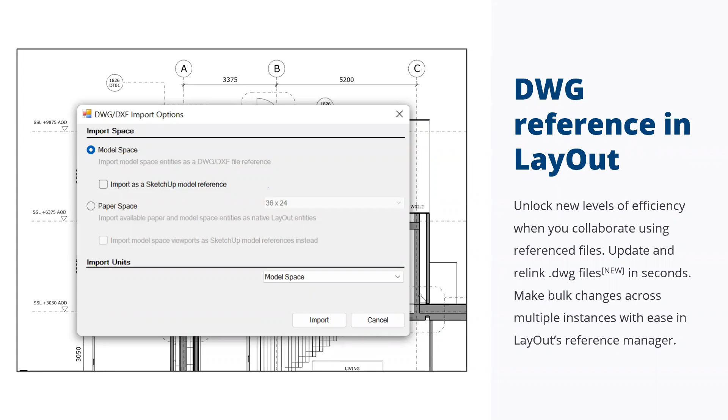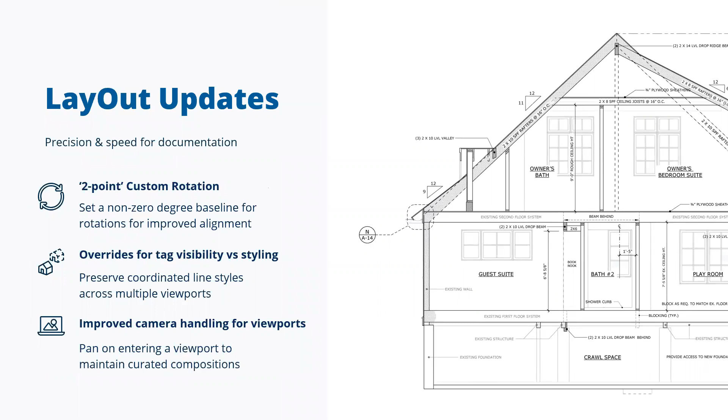LayOut's had a whole bunch of additional changes. We're not going to go through all of those, but again, if you're a LayOut user, you'll see some little updates and tweaks and improvements in terms of how you rotate and how you can style things.

SketchUp for iPad just launched version 6.2, and that's got a whole load of additional things, support for the new Apple Pencil. It previously supported the previous two, but the new one has the ability to hover, so you can actually be using the Pencil above the screen itself, so it knows when you're actually touching the screen and when you're not touching the screen, and there's some functions that come into how natural it feels to use.

You've got the option for customizable shortcut toolbars, the flip tools there. You've now got tag folders, the same as you have in the desktop. The solid tools, which are a core component of the desktop, are there, and you've got dark mode on the iPad as well for keeping your eyes relaxed.

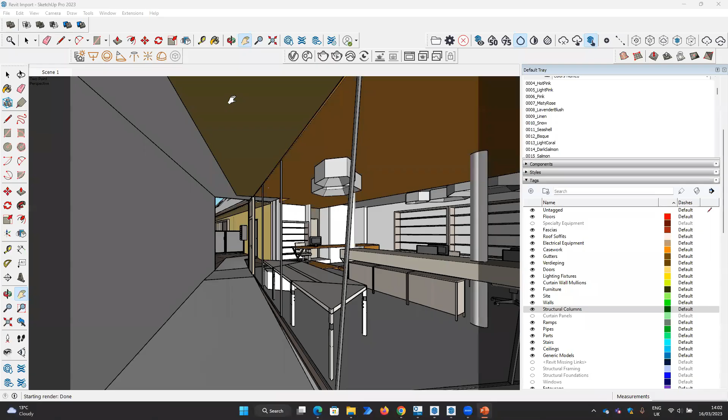And then I think just other bits for you to look at if you'd like to. You might not know about these, but we've got SketchUp Labs, which is the part of SketchUp where we can see some of the experimental products that are being worked on.

So this Trimble Creator is the technology that powers the live components inside of SketchUp, which are the interactive configurable components that exist. You might have seen some of the windows or the bifold doors and stuff that allow you to adjust the size.

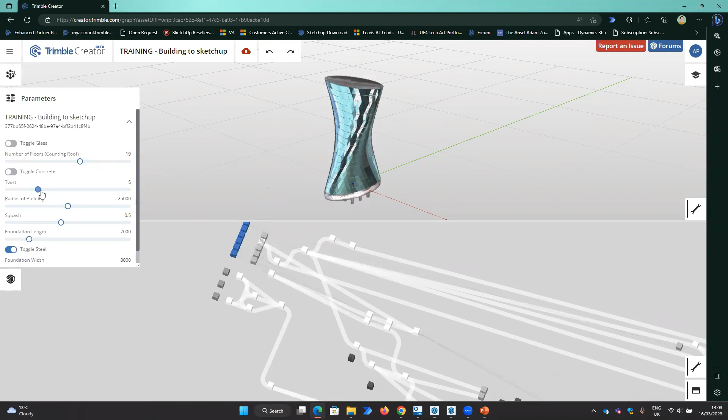And this is actually the interface that allows you to create your own parametric geometry now. So if you have maybe ever investigated things like Houdini or Rhino or geometry nodes in Blender, we're actually able to create parametric 3D geometry now, and this means that we can create adjustable, customizable geometry. This will be useful for people that are wanting to create kind of either mathematically complex geometry, or perhaps you are a furniture maker or a product manufacturer and you want to provide configurable components to either your design teams or to consumers to actually use inside the 3D warehouse.

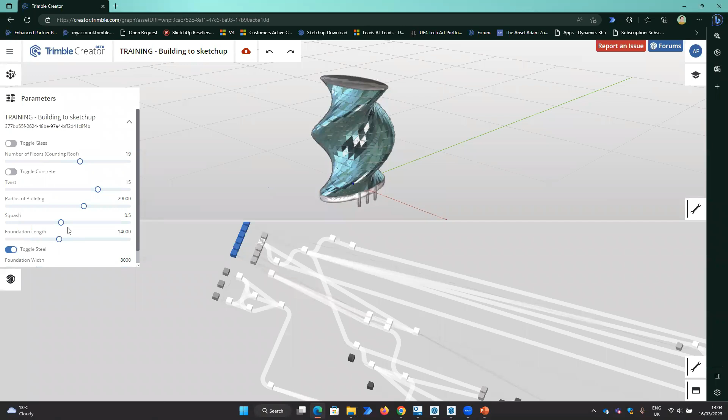So you can access this via creator.trimble.com. Some really great tutorials to get you started. Just up here, it tells you how to use it.

Sorry, that's throwing me off. It's not meant to be popping up in the corner of the screen. Team, please don't message me on chat, please.

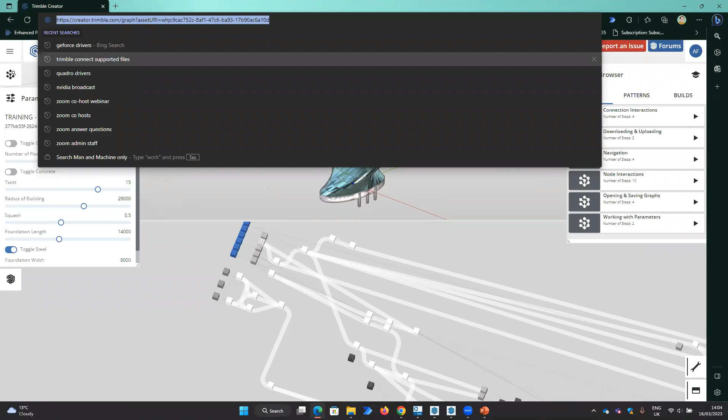The other one we want to look at, coming soon to SketchUp, it will be a new version of 3D Warehouse, which is currently available in web browser. But if you'd like to have a look at the new 3D Warehouse, you can visit that. It's labs-3dwarehouse.sketchup.com.

This is one of the things that old versions of SketchUp have made way for now, because we've now got more modern browsers in SketchUp 2023 and 2022. It means we can use more modern browser features for 3D Warehouse. The 3D Warehouse, obviously, of course, you go away and search the models you want, but the new Labs version, which will become the main version at some point, has a much more powerful search, and there's lots of really cool search functions that are coming along.

So if you've ever used 3D Warehouse, you might be familiar with how searching for an object often doesn't really find you anything you want to find. The search actually has been totally overhauled, so it kind of behaves a bit more like it would do on Google or an actual search engine. So not just looking at the title of the model, but looking at the description, looking at who has used those models, who has added a certain chair to a collection of mid-century furniture, and making smart decisions about what that object is. And there's also some clever image stuff that'll be coming soon, where you might be able to take a picture of a piece of furniture, for example, and find something similar from the 3D Warehouse.